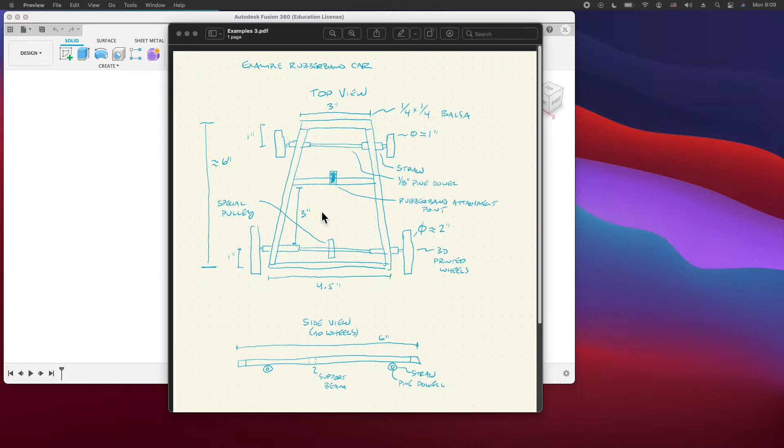I have some dimensions: 3 inches wide, 6 inches, 4.5. I think these will work out, but you might need to change it a little bit. We're using 1/4 by 1/4 balsa in order to do this.

I have some wheel dimensions, like the distance from the front extremity and the back extremity for the wheel placement - 2 inches in the back, 1 inch in the front - but I won't get to the wheels here. I'm using straws as sort of the axle holder, and a pine dowel for the axle.

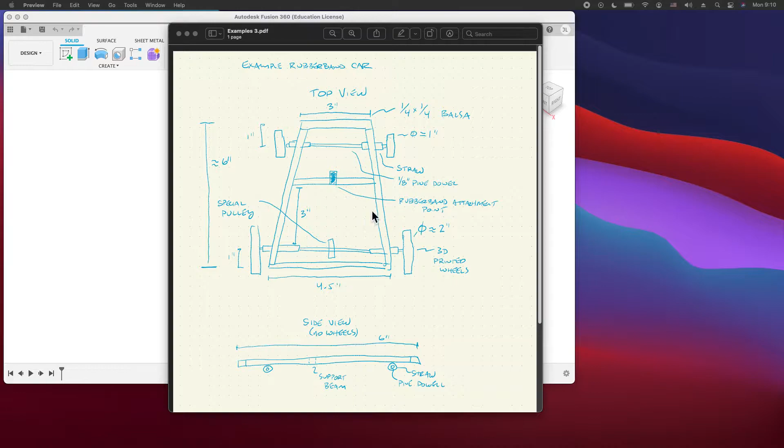You can sort of see where the wheels or axles rest inside the straws and how the whole frame rests on those 2 wheels. So we're just going to recreate this trapezoid here and work through it. Bear in mind that yours probably will look different than this, so use some of these techniques to put yours together.

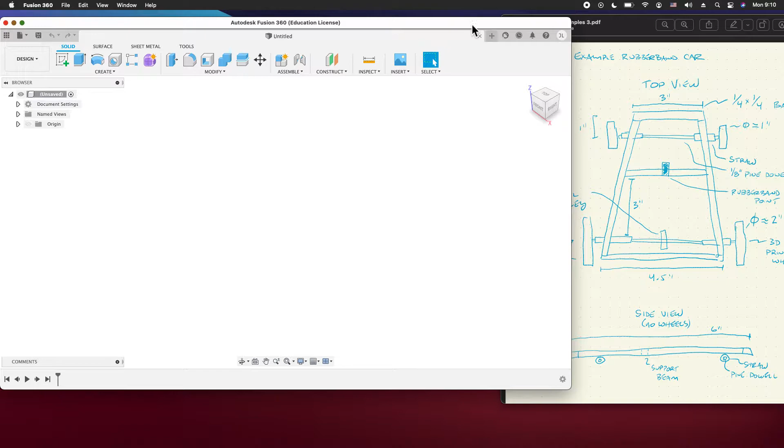I'm going to start with a new workspace here, creating a sketch using the top view. I want to make sure I'm using the top plane to create that sketch. I'm also going to change my units into inches because I feel more comfortable for this particular design using that.

So what I'm going to do is create this trapezoidal shape. There's a couple different ways you can do this, but the way I think is potentially easiest is to just create a rectangle, and then fix the rectangle and make it trapezoidal by chopping off 2 bits of the edge.

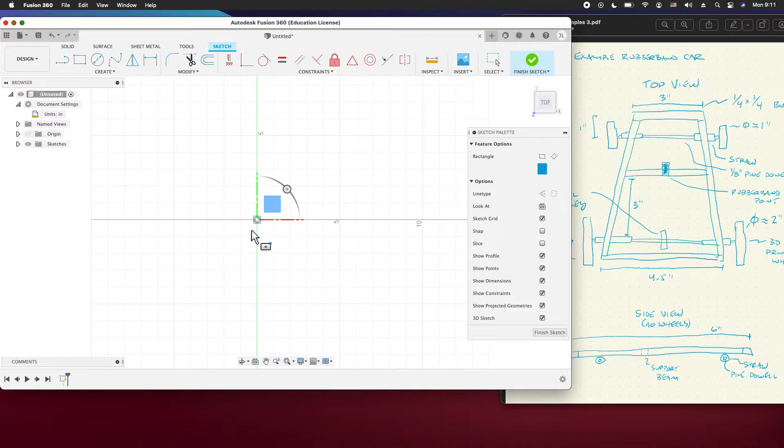So it's going to be 4.5 wide by about 6 inches tall, and I'll use a center rectangle to do that. I said this was 6 inches, and this is 4.5 - this will be the extremity of my car. Let me zoom in just a little bit.

Now, in a moment, we can go in here and create construction lines or even remove parts of this if we wanted to, but we're not going to do that just yet. So what I need to do is mark out the 3 inches across the top here - you could do that in different ways.

So if I wanted to, I could simply delete that line right there and then create a line on this line that is exactly 3 inches long, just like that. And so I have my 3-inch line.

Now the trouble is that I need to make sure this thing is actually centered, and I can do that a couple different ways. But one way is to make sure the distance from this point to this point remains exactly that 4.5 minus the 3 - so that's about 1.5 difference, or 0.75 on each side.

And I can actually draw a dimension line in there and say that this is 0.75, and it will drag it over.

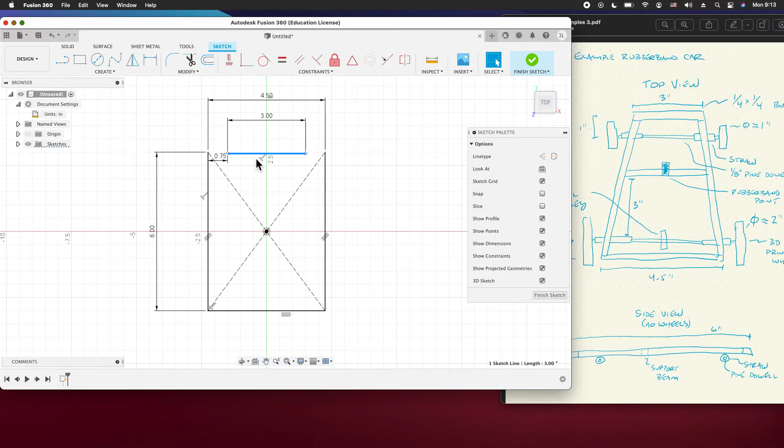Now the way I have this, it's not in line with it, but I can easily fix that. Notice you got to be a little careful here because it starts messing things up in your overall rectangle. So I'm going to get this just right so that stays horizontal, everything stays horizontal, and that's in line there. This might not be exactly perfect, but it's good enough for what we're doing.

So we're going to leave it there, and then I'm going to make my trapezoid. I'm going to take this corner and bring it up there, and take this corner and bring it up here.

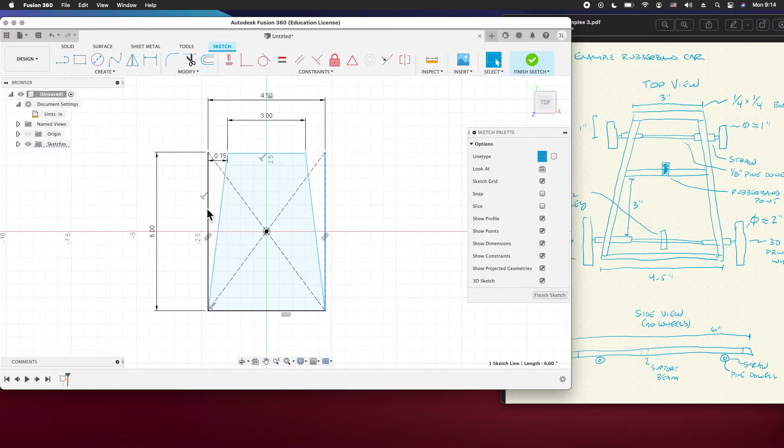Now my car is starting to take this trapezoidal shape. What I can actually do is turn some of these things to construction lines. So if I click on that and change it to construction, and take this and change it to construction, it doesn't interfere with any of our work or mess up any of our dimensions, but it's all still good. We're going to leave it just like this.

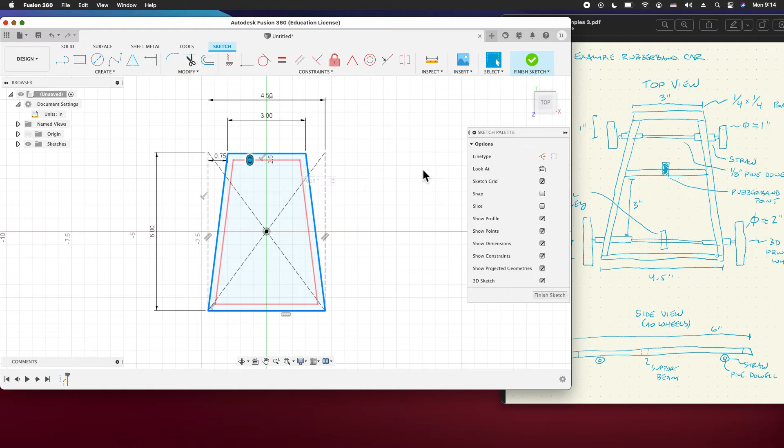Because this is quarter by quarter balsa, the easiest thing to do is use the offset command. I'm going to offset this inward by 0.25 inches, the thickness of the wood, so I have these concentric trapezoids. Notice how I have these cuts that go across here, because these are actually 4 separate sticks.

I can zoom in just a little bit and add those lines that go across. Get this just right here, like that. A little laggy here, hold on one second, fix that.

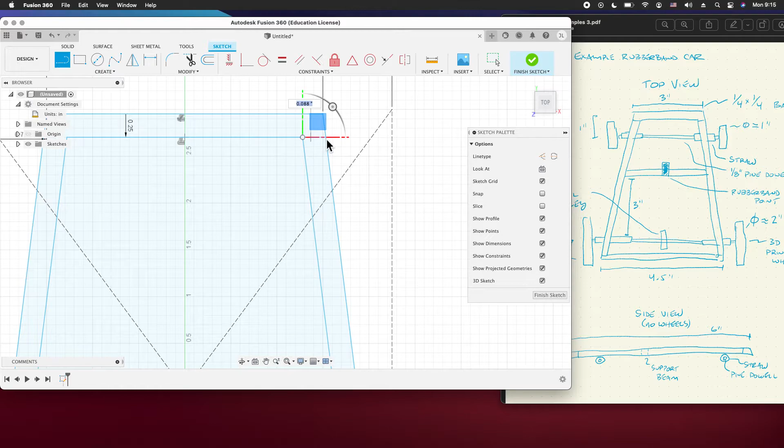There's one, and then I can move over and do the other one. Some of these things are easier if you're zoomed in a little bit, and that's why I went all the way in, so I can bring that right across. There's the other one. Zoom out, get down here, and then go down here and do the same thing.

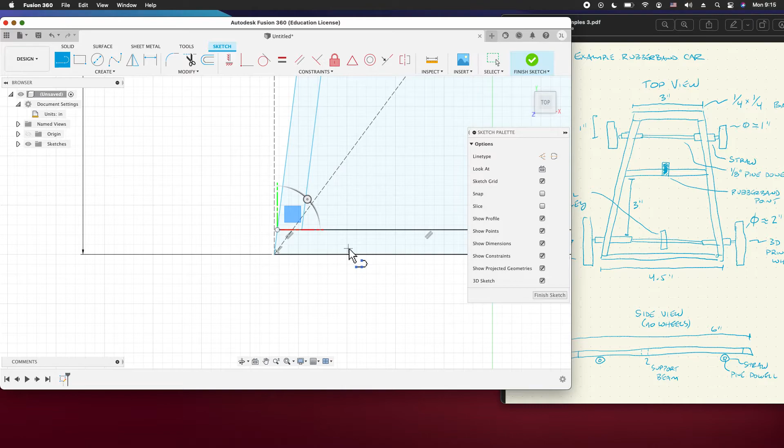Zoom in a little bit. Bring this right across, just like that. And then I got one more to do, and this is the final one. Just like that.

Now, if I zoom out a little bit and pan around, I can actually see these 4 different sticks here, and I could start extruding that.

But what I might want to do is put this beam in here for the time being. It's roughly, based on the dimensions that I have here, about 1 inch plus about 3 inches, so it's about 4 inches from the bottom of the car. Let's see if I can do that.

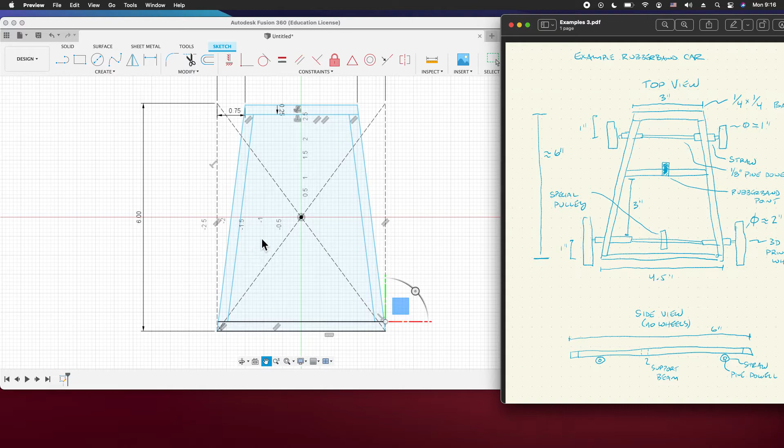I'm going to go back in here and use the line tool, and I'm just going to put a line sort of arbitrarily across. It should make it horizontal and coincident. Now what I can do is go ahead and add the dimension to get it just right. I'm going to click on that.

And I'm going to click on this. As per my sketch, I have this at about 4 inches is what I have it at. That looks pretty close, so I think I'm going to leave that there.

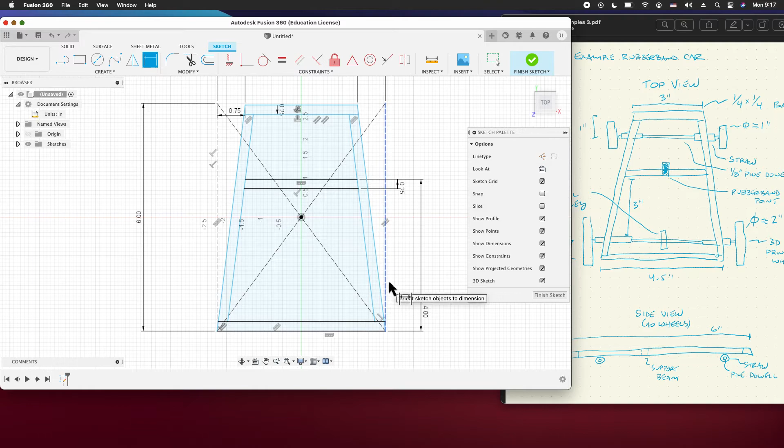Then I can go ahead and draw the next line, which is the thickness of that beam, and I've got to make sure that's actually 1/4 of an inch. In order to do that, I'm now going to specify a dimension right here, and that's 0.25. It's looking like that's exactly what I need, so I'm going to finish this sketch.

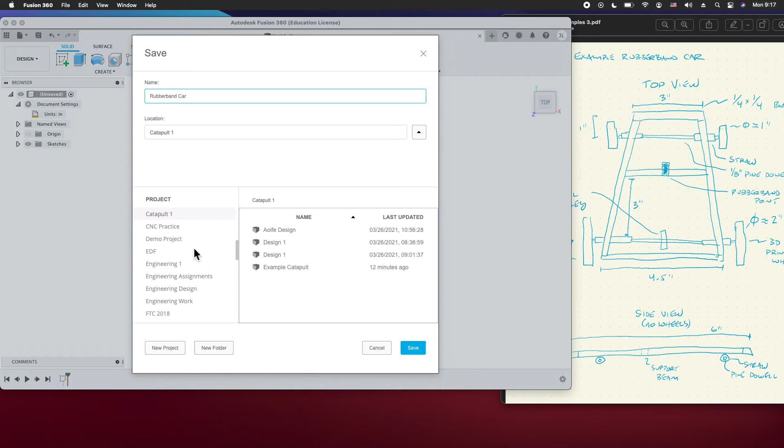You can see all my stuff here. What I'm going to do at this point is save this because I haven't done that yet, so this is really important. You might want to make sure that this is in a project area, so demo project, I'm going to save it in here.

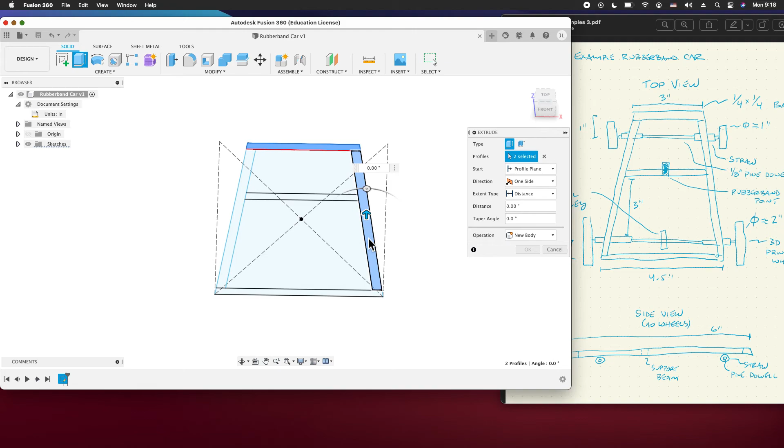I can orbit around and see this, and I'm going to use the press pull command to extrude this. So I'm going to take this and this. Be aware here that you can't do adjacent ones, otherwise it will join all these into one, which you don't want to do, so I'm going to do ones that aren't touching each other.

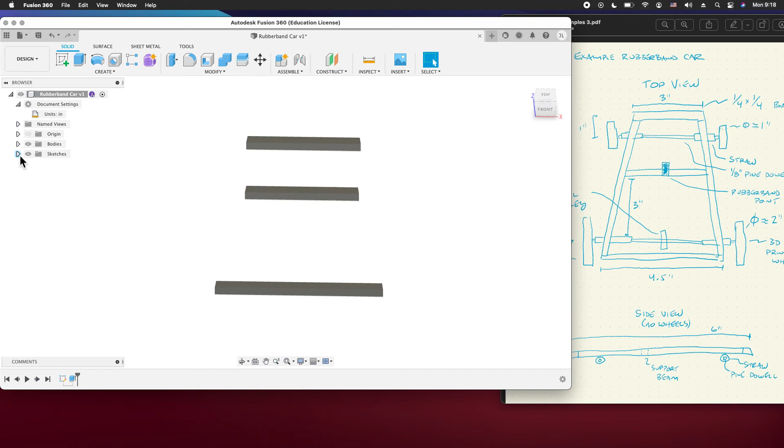So I can do these 3 at the same time. All 3 of these come up by a distance of not 25 inches, but 0.25 inches. I can make sure that's on new body or new component. The sketch turns off, so I am then going to turn the sketch back on.

And I can now do these 2 ones right here. Again, 0.25, and I don't want to join them. I want a new body for the time being, and I'm going to just hit OK. Now I can turn that sketch back off.

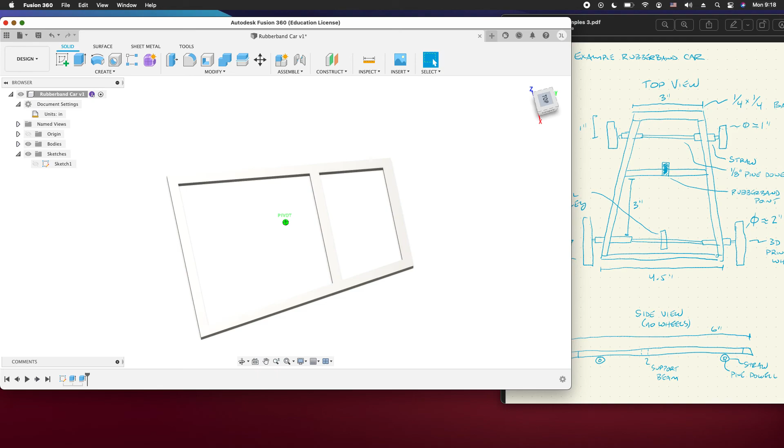Now I have my trapezoidal beginnings of a frame right here, and I can start adding some of these other features.